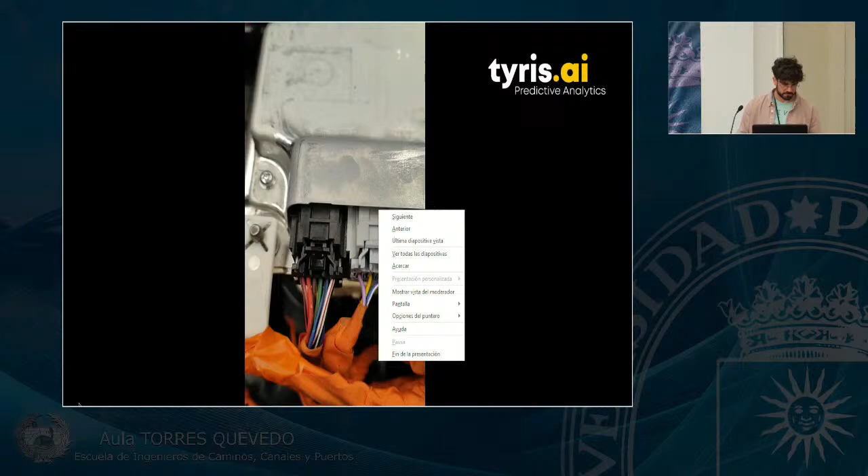At Tyris, we know how important it is to cover the whole data life cycle from the beginning to the end. This is why we are dealing with data sources from the early beginning, from the acquisition phase. We treat data, we squeeze data, we do whatever is necessary, and we extract the most relevant pieces of information so we could feed algorithms, we could feed models that we are making on our own. And finally, we provide end solutions to our industrial customers.

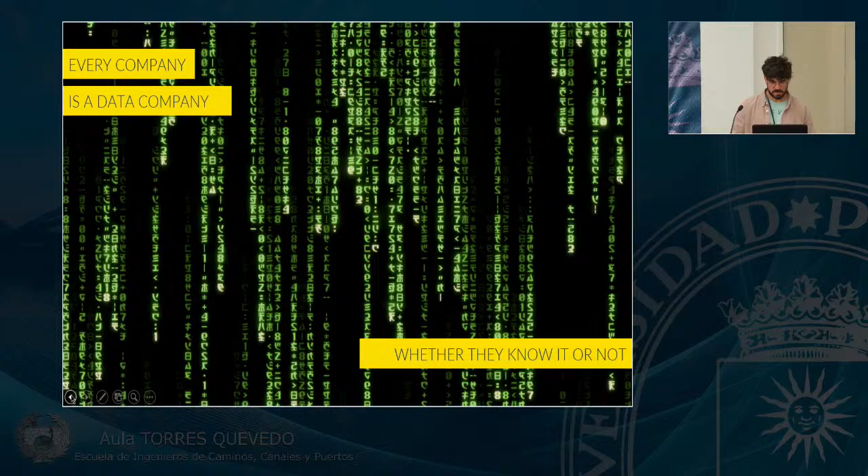And to that end, we are based on 3 pillars. The first one is data integration. What does it mean? It means that we go to the industrial environment and we connect our own sockets to whatever is there, machines, databases, IoT devices, whatever. As an example, we are developing right now a European project in which we are connected to a plastic injection machine.

A plastic injection machine is made of a mold built on two halves, and the plastic is injected inside. This is a European research and development project, and if we achieve this, we will be revolutionizing the way data is acquired and processed.

Why? Here's an example. We are reading pressure and temperature from the injection molding machine through industrial protocols. This is the first step. The second step is data analysis and model training.

This is where the cool things start to happen. These are funnier because we build things that can be seen, like what you see outside — artificial intelligence models that make decisions based on data. In the example I just posed, our model was built by the consortium, a very large consortium made of more than 10 companies from all around Europe.

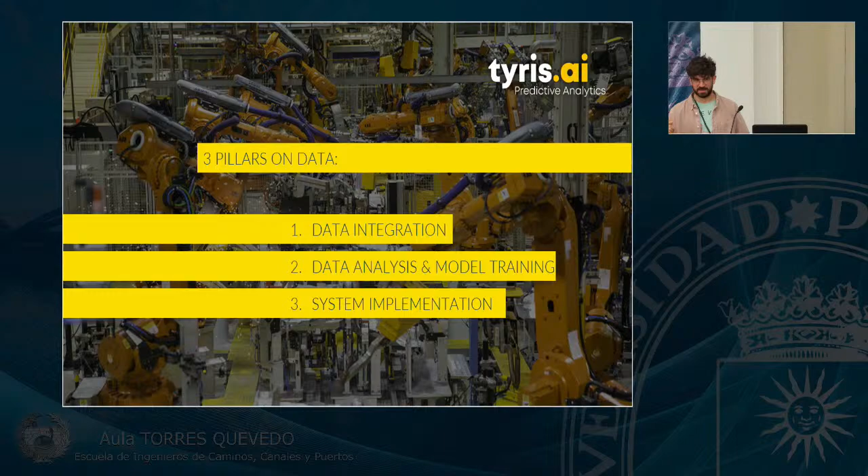But not only that — in the last stage of the project, we need the model to tell us: I don't only know your part isn't going to be okay, but I know the right combination of pressure and temperature so your part is okay at the end of the process. This closes the loop — the model tells us what parameters we need to set in the machine.

This is why I mentioned at the beginning that I was an industrial engineer. I used to spend weeks in the industrial environment trying to find the best combination of pressure and temperature parameters, and that was really difficult — it was trial and error, and that was just 10 years ago.

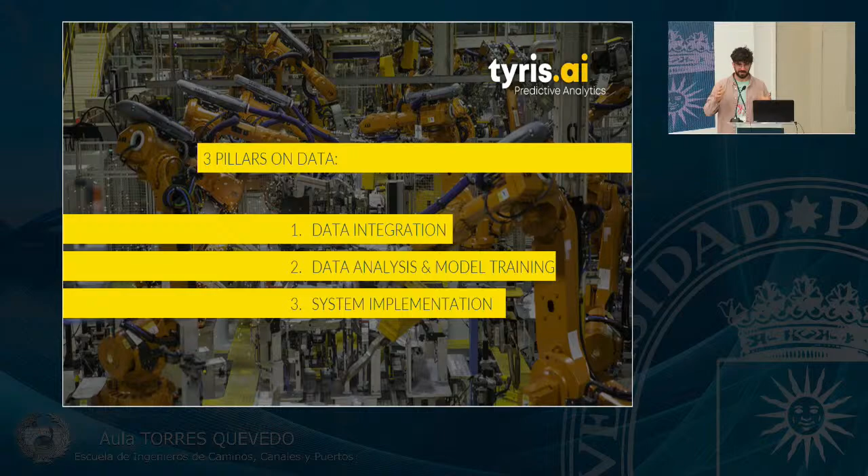Look at where we are now. We're able to say, okay, we have a model doing the work — not with the human outside the loop, but inside the loop.

And finally, we do the system implementation, closing the end-to-end product that we are delivering. We build dashboards and interfaces so we can exchange information with the machine and with the models.

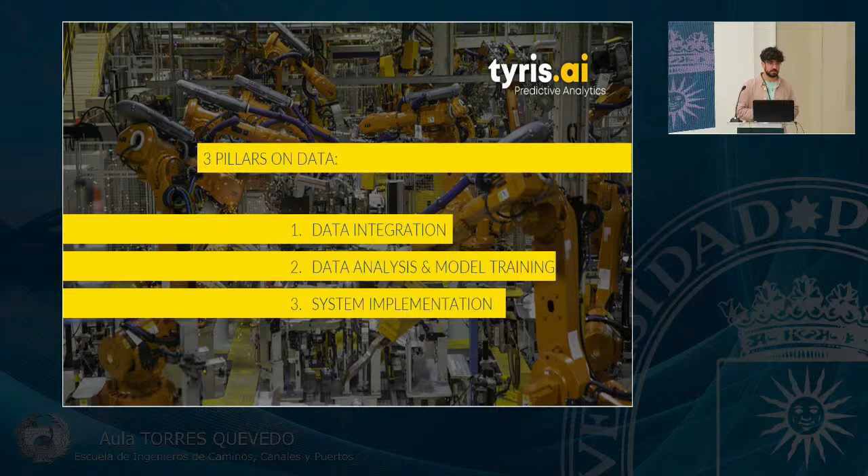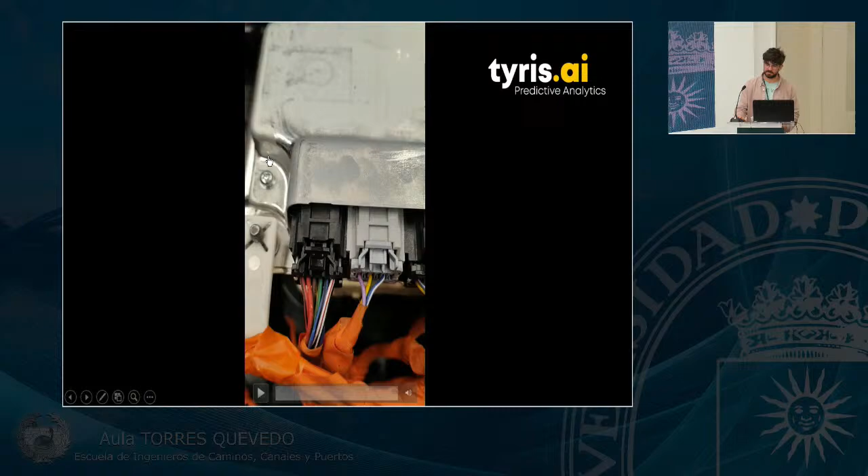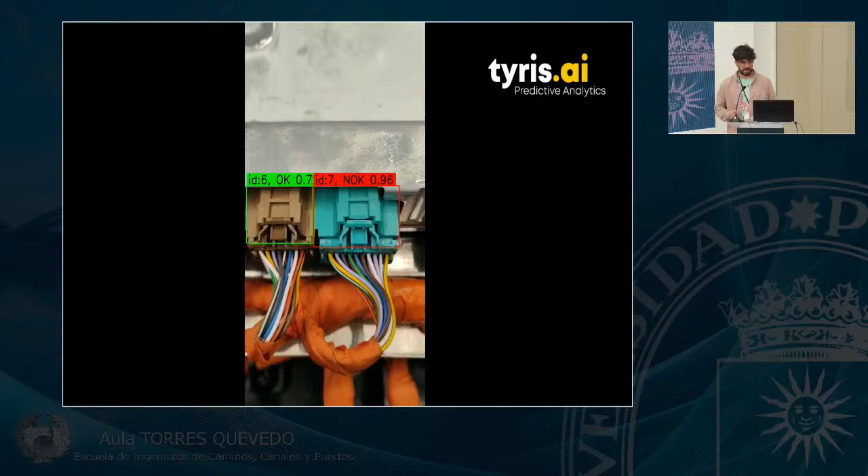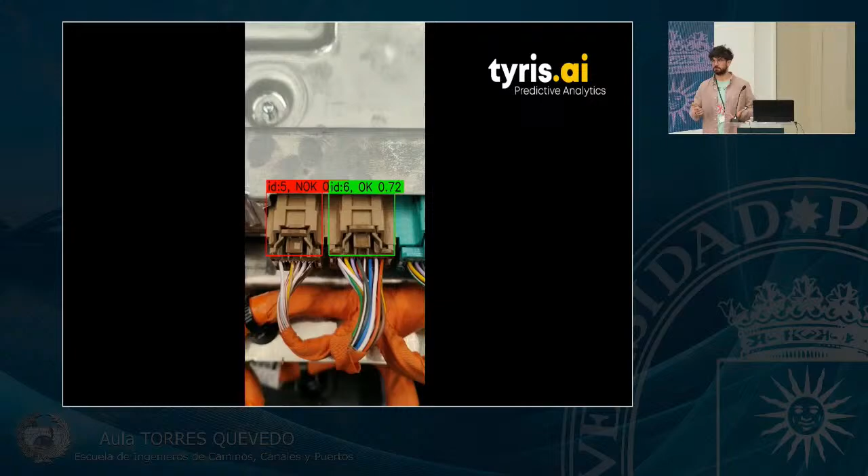I'll be shorter than my colleagues, but here are a few more examples. What you're seeing here is a battery from an electric vehicle, and this is an artificial intelligence model that we built on our own — we don't reuse commercial or existing models from the market, we use our own.

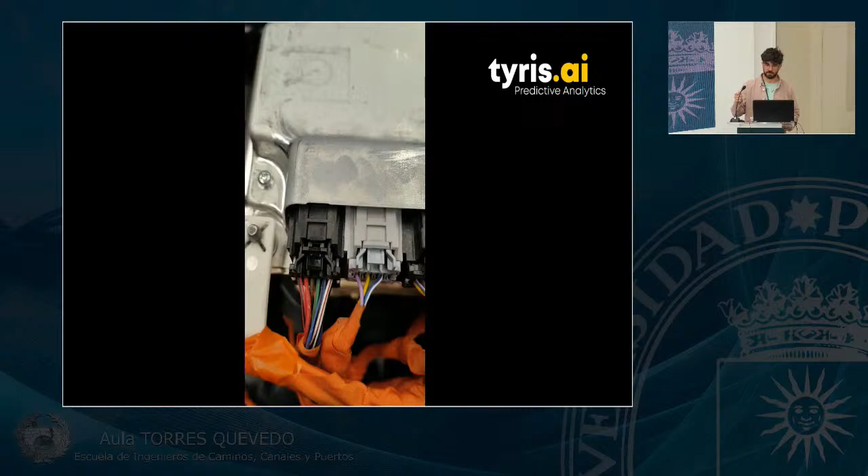This battery is inserted into a vehicle, but sometimes operators are working so fast building the car that they plug the connectors incorrectly. When the car is finished at the end of the production line, if someone in the testing facilities realizes the plugs aren't correctly connected, it becomes a costly problem, because they need to dismantle the rear of the vehicle to find what's wrong.

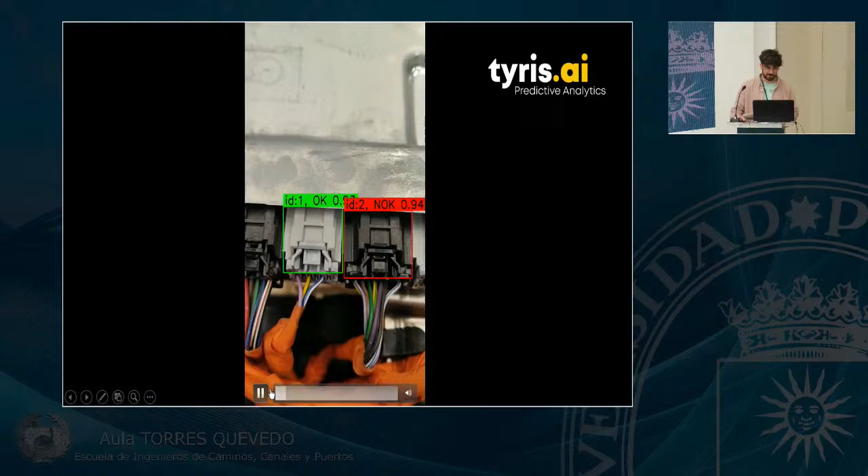I can see what's wrong here, and you could too, because this connector is not correctly plugged. I know it because I'm human, but we trained the machine to make this easy — it correctly identifies which connectors are properly connected to the battery and which are not.

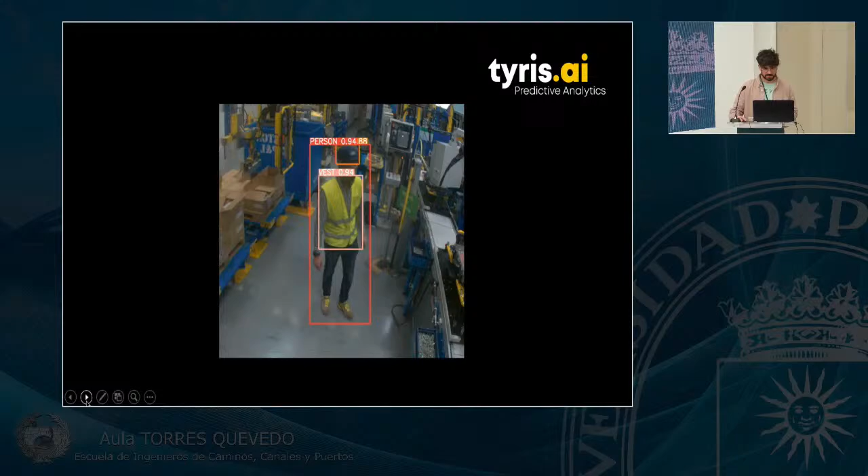Let's go to the next example — this is my colleague Jordi.

We developed another model that first detects persons, then detects vests, and then detects the cap or hat my colleague is wearing. This is a safety application — sometimes in the industrial environment, operators take off their vest, which poses a safety problem.

Whenever the model detects a person not wearing the vest or not wearing the cap, it raises an alarm somewhere in the environment saying this person is not wearing the right PPE, the personal protection equipment.

Also, as our colleague Asunción was mentioning the GDPR, you can understand how difficult this is — you need to identify people, but not in such a way that you can identify everything this person is doing in the environment.

So this is a special case because it is a safety issue.

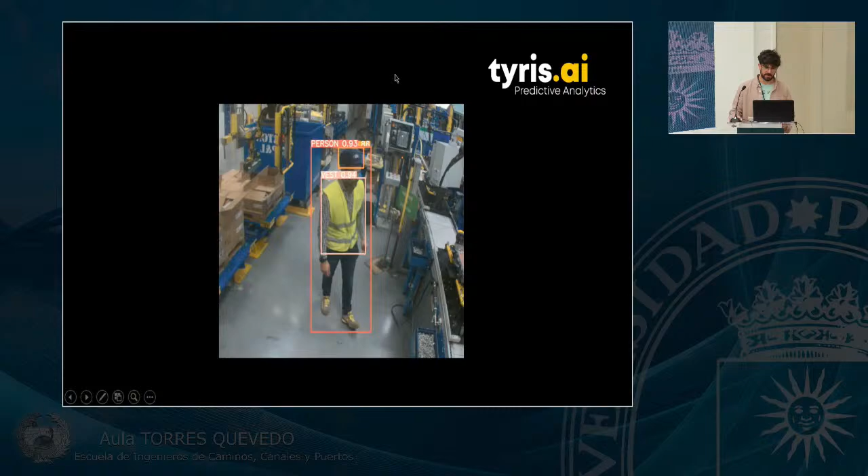But in other cases, for example with the pressure and temperature in injection molding plastic, we cannot do things like creating a data set. We are gathering data every second, pressure, temperature, but we cannot say okay, from 8 to 12 there is one person working on this, and then from 12 to 4 there is another person, because that would pose a GDPR issue. But sometimes we need something similar to that, because sometimes we don't know why the labeling of the data sets are not the same.

So, well, issues and challenges in the industry.

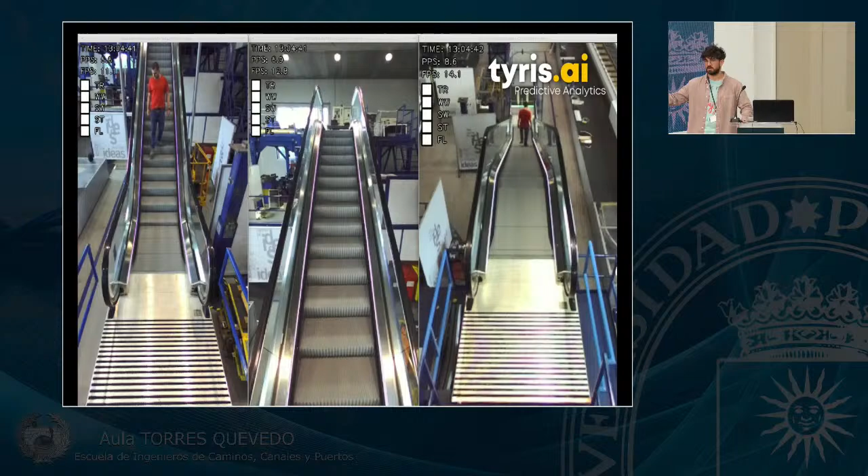I have another example here, which is stairs. This is a static camera in a commercial establishment, and as you can see, this person is doing something wrong. First he was going up the stairs, but then he was going on the other side, and that is detected as something that should not be happening. For example, if that person would be taking his arm outside the stairs, that would be raising an alarm as well. So this is the kind of things that we are doing.

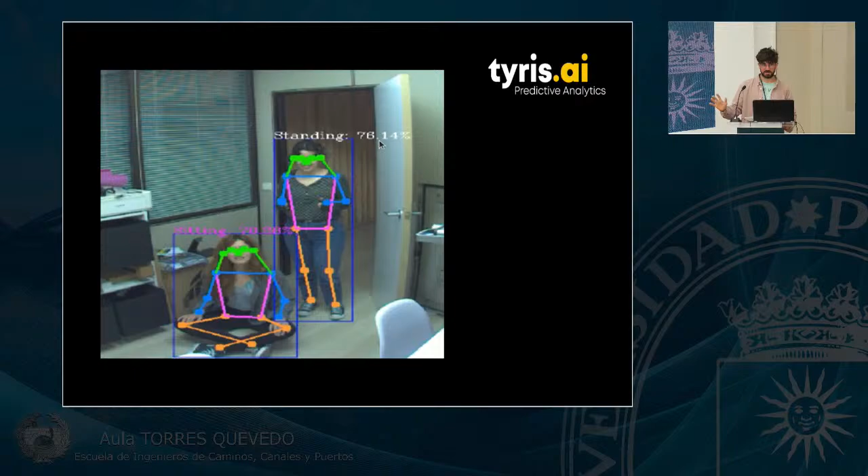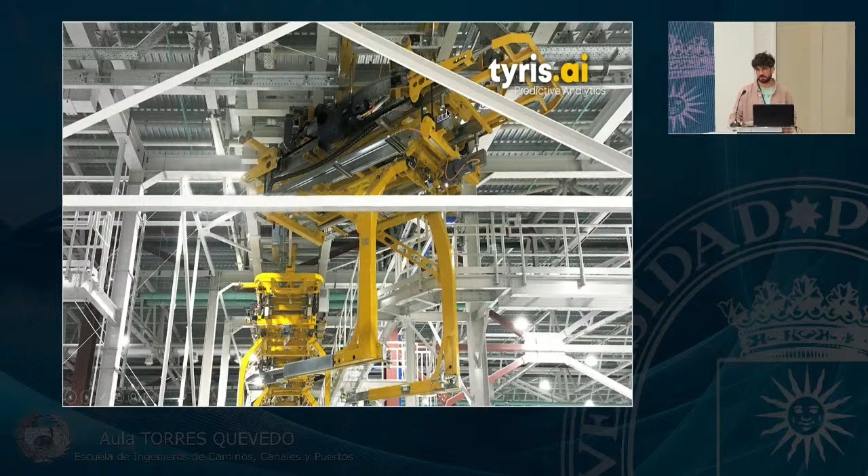But this is data, this is data prediction. We are analyzing, or the industry is analyzing, electrical patterns in the conveyor systems, in these carts. And when the pattern is detected to be anomalous, then that particular cart is separated out of the rails and it is repaired. It is because every minute or every hour the industrial environment is stopped, they are losing millions. Imagine Ford is getting out 2,000 cars per day, so they cannot afford to stop the line for 1 minute. This is very, very critical in terms of cost.

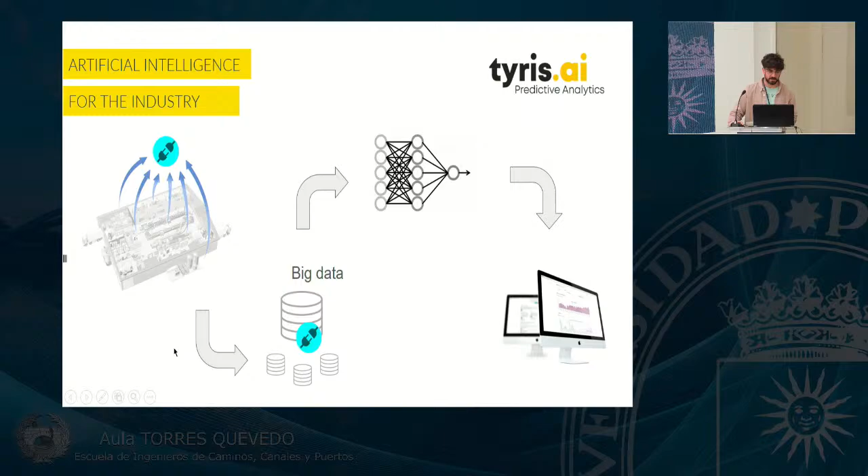It is as easy as that, because we have sensors, we are acquiring data. A manufacturing plant is not static, it is dynamic, but a building, an infrastructure, is also dynamic. A building is alive from a data perspective, and there are always things happening.

Don't think of a building or an infrastructure as a static concept, one used for conceiving the work, and once construction is finished, it's done and not used anymore. Maybe in the past it was like that, but it's starting to change. It's becoming different.

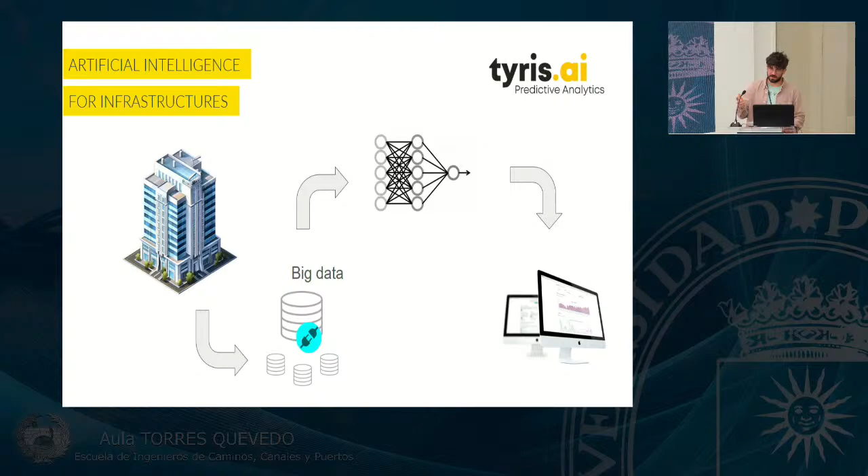Buildings get old, infrastructures get old, so they are always changing, and now with sensors we can track those changes. For example, here is another project we have done. It's a picture, not a video, but I have a video of this too. We did this with one of the most important construction companies in Spain.

What you're seeing is that they wanted two things: drones, and vehicles on the road that could acquire visual data from the road. So these are the results. This picture was taken by a drone, and they can detect potholes, or say something like - and this is even more interesting - warning, there is a high CRT here. Something is going to happen in the future.

So let's talk about the BIM. Traditionally, the BIM was representing the past of an infrastructure. It's like a passport, a virtual representation of what happened in the past, including technical decisions, design decisions, contracts, 3Ds in the best of cases, but not always, and many other things.

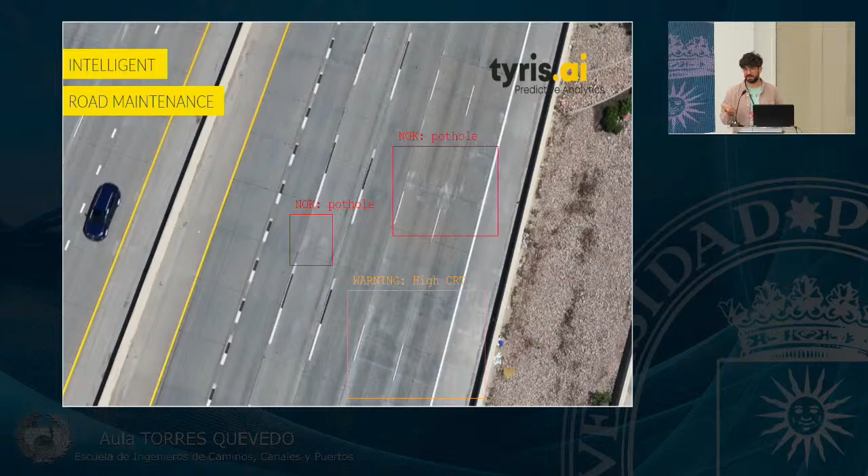Not only that, but the big construction engines are starting to think - and I'm very glad you spoke about that - they are tending to include models in the BIM, but this technology is not yet fully implemented. It is staying in the research, development and innovation domain. We are starting to do that. I want to show you the video of the results.

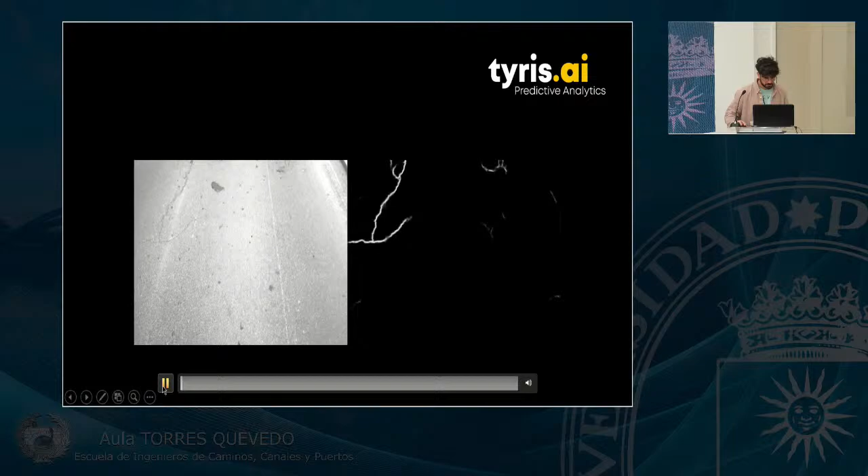This is the model in action. This is what it is detecting. The white areas are the cracks and the not-okay parts - pieces of information that can be gathered in real time.

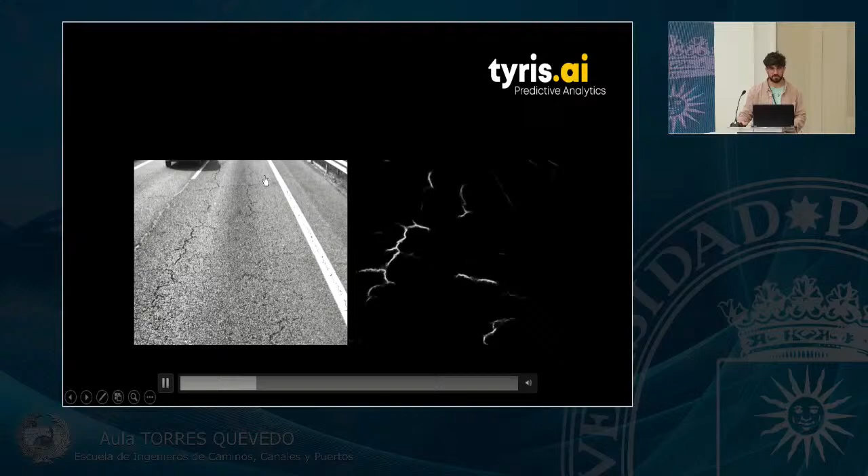This leads me to something that at Tyris we like to call what-if functionalities. A digital twin is a virtual machine, isn't it? It's something representing reality, but not everything - it's like a simple model representing the reality.

As such, we can simulate normal behavior - we can simulate something that is happening to a bridge. But this is very interesting, because with what-if functionalities, you can do things like simulate abnormal situations.

So now that we have a digital twin, the BIM, sensors, and real-time acquisition of data, in 2024 we are trying to include artificial intelligence models inside the BIM, so we could represent what will happen in the future - not in normal conditions, but in abnormal conditions.

This is not easy to do, because a 3D or traditional linear simulation is not enough. We need to implement advanced analytics for that to happen. But we still don't know how to do that. We are spending a lot of money - the European Commission is funding a lot of projects trying to do that, trying to fit artificial models inside the BIM.

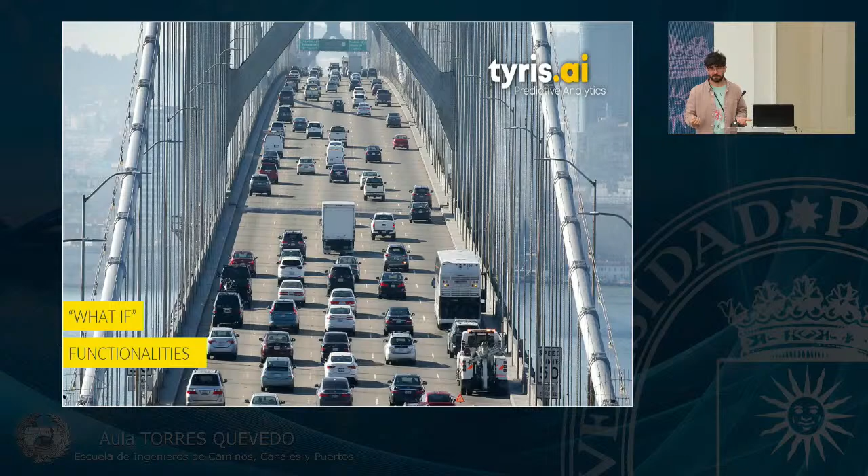One thing we are trying to predict is to link and make a model connecting traffic volume with the predictive maintenance of the bridge. We are not trying to build a model to know if the bridge will withstand charges or resistance - we already know how to do that. But we are trying to link that with cost. If I need to take the traffic to a different road, I could decrease the maintenance of a bridge, and instead of doing a visual inspection every 2 months, if I can do that every year, I am saving money. This is why the industry is going this way.

We're at a very interesting point in time. Very few companies apply the technology in this way. What can we do to push further the state of the art? What can we do to include artificial models, sensors, and digital twins together - these 3 legs of that table?

Well, through research, development and innovation - this is one of the things we are doing at Tyris. There is a program called Horizon Europe. There are many other programs, national and regional ones, but this one is really interesting from our side.

Just to name a few, we have 2 projects ending right now. One is Teaming AI, which is trying to make a digital twin of industry 4.0, including artificial intelligence models. I feel especially attached to this project because I was the development engineer in charge of finding the pressure and temperature combinations in that machine. So now that a machine is doing it, what is my role?

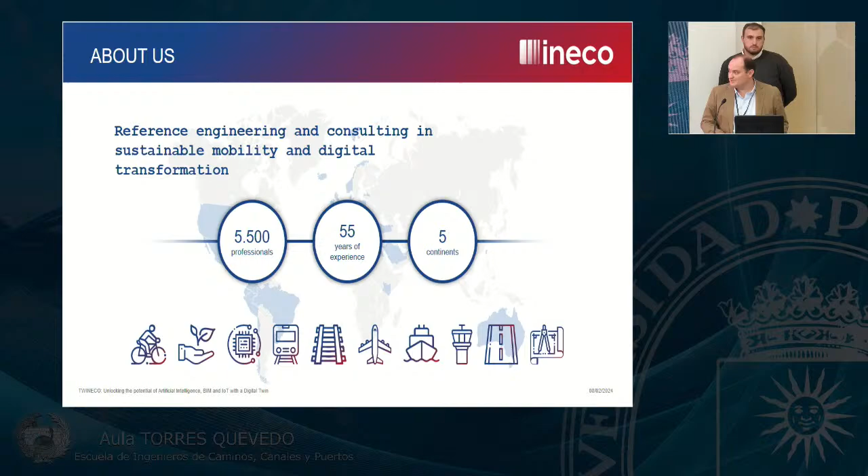And INECO, as a reference in digital transformation, dedicates a significant number of hours to innovation projects, more than 30,000 hours every year. By means of internal calls, every employee can propose their ideas for execution as an innovation project. Some of them are chosen, and finally some arrive to market. This is the case of TWINECO and other projects, other products. This is one of the aspects of our work that we enjoy the most, because innovation is in our DNA.

And why did we decide to implement a digital twin? What problems do we want to solve? To answer this question, we should give you some context first. As I mentioned before, one of the fields where INECO undertakes projects is air navigation.

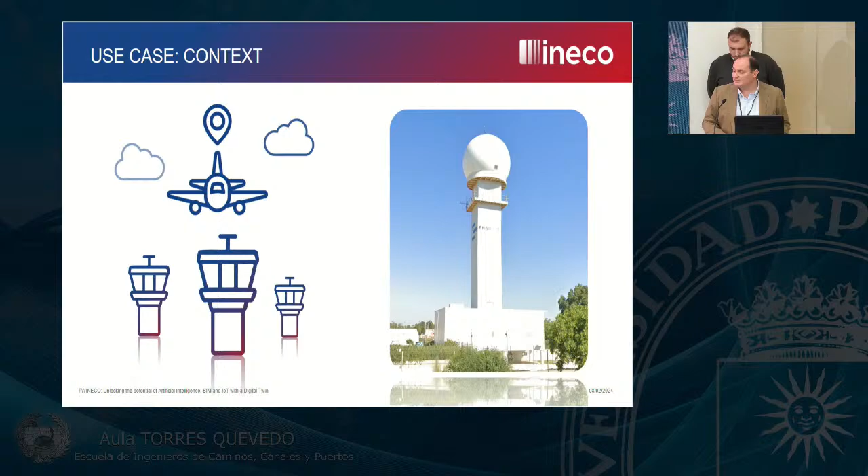One of the infrastructures where the digital twin concept proves to be very beneficial is radar, a surveillance system used in navigation that is used for detecting and tracking aircraft. They are crucial because they provide real-time information to air traffic controllers.

Don't you think that the next year will be exciting for engineering? I don't have any doubt about that, and this is the case in air navigation.

Objectives such as capacity, safety, cost-effectiveness, and sustainability involve demanding challenges that we have to deal with in air navigation. Moreover, there are hundreds of air navigation infrastructures distributed through the territory, some of them in the middle of nowhere, which implies high operating and maintenance costs. For this, it will be essential to rely on tools that help us in decision making in a more and more complex and volatile context, with an increasing number of systems and information sources. Moreover, these tools should let infrastructure operators optimize their operation, keeping in mind sustainability.

So current trends of centralized information, interconnection of systems, or new technologies such as IoT, artificial intelligence, or BIM can be the best enablers for infrastructure operators.

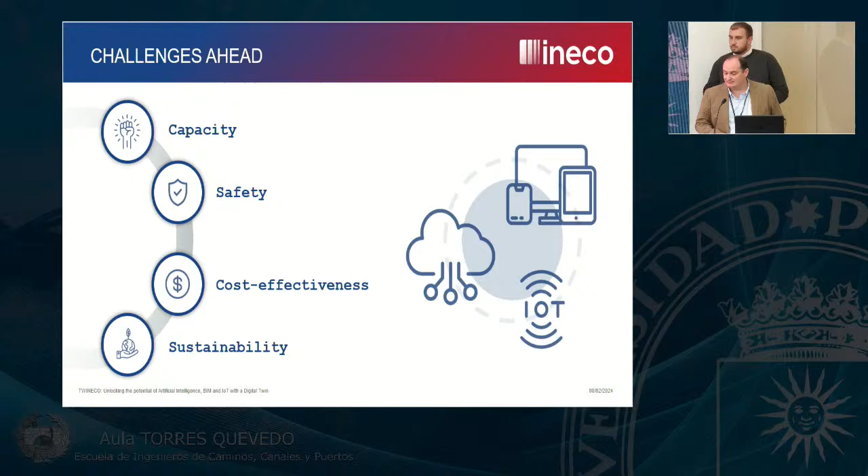Infrastructure operators can take advantage of this concept, and we will show through an example the success case of TWINECO. As a result, TWINECO works as an integrator of information and tools based on new technologies that enable quick decision making, optimize operation, and reduce environmental impact.

This system lets us perform immersive browsing through the three-dimensional model, besides the information that comes from the BIM model. In addition, and I think it's one of the most important parts, it gives access to real-time data related to the operation of the shelter and equipment of the radar. This information is provided by sensors and a deployed IoT system, besides other information sources such as meteorological information.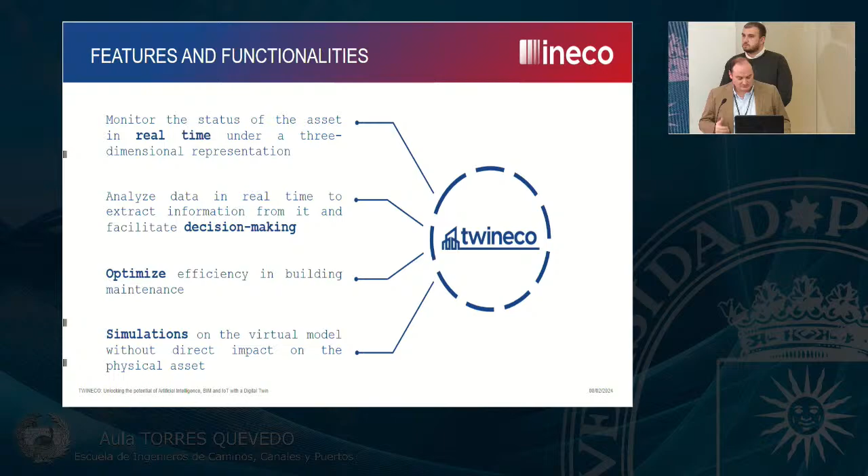TWINECO also has better performance than traditional monitoring and management systems because it enables simulation and predictions, optimizing infrastructure operations, and as a consequence enhances maintenance efficiency, sustainability, and resilience using artificial intelligence and machine learning models for predictive maintenance, energy optimization, or the ability to simulate different contingency scenarios.

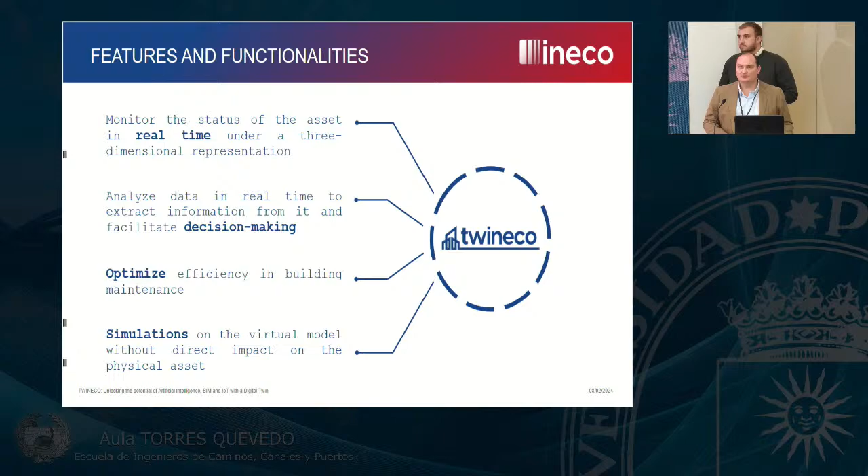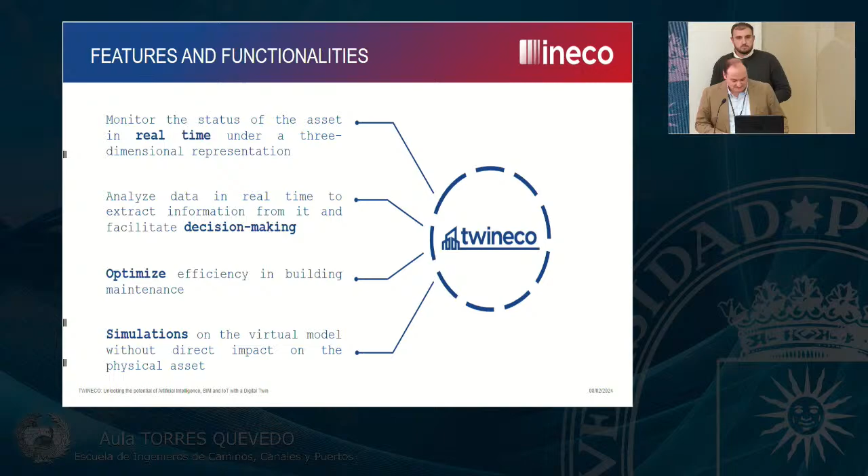For example, engineers can ask questions like, what if we increase the shelter temperature by 2 degrees? How would it impact energy consumption or equipment performance? Or what if the air conditioning fails? One of TWINECO's strengths lies in its flexibility and scalability, allowing the integration of additional information sources and simulation models, and adapting to evolving needs.

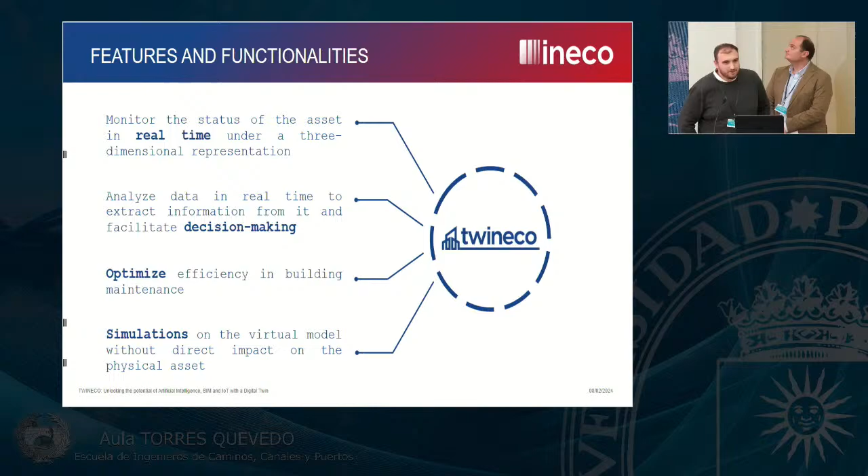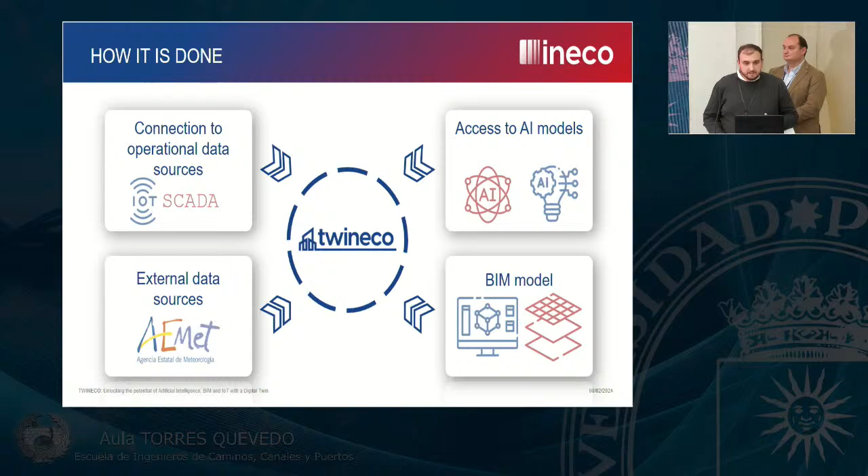First of all, we can differentiate 3 main parts of the application. One is dedicated to generating the user interface, commonly called the front end. Another is to manage the information through the application, that's the backend. And around it, the rest of the information access services. This information comes, for example, from the IoT systems, the SCADA systems, or the sensors deployed in the building.

Or, for example, other external sources of information like AEMET to obtain the meteorological information of the place. Also important is access to the artificial intelligence models developed, and the acquisition of the 3-dimensional model coming from a BIM project, and the necessary tools to interact with them. This architecture improves the performance of the application and allows great scalability when trying to connect new sources or new buildings.

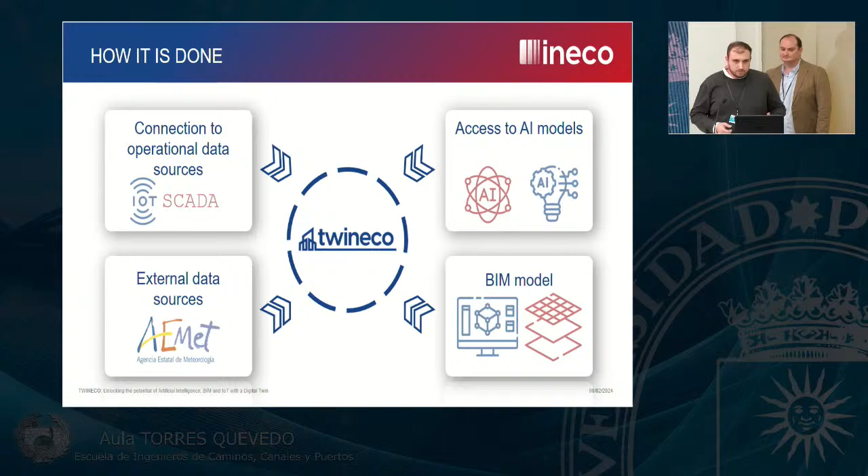Now we'll try to introduce the application by exploring its key functionalities, giving a guided tour of its navigation interface through the building and the visualization of the data. In addition, we will show you the access point of the simulation tools, as well as the representations of the results generated from the artificial intelligence models. To do this, we will show you some videos using the application where you can see each of the 3 main functionalities, which are the navigation from the 3-dimensional model of the building.

The real-time information windows, and the simulation tools available. In addition, we will try to describe the main characteristics of each one. And therefore, let's watch the first video.

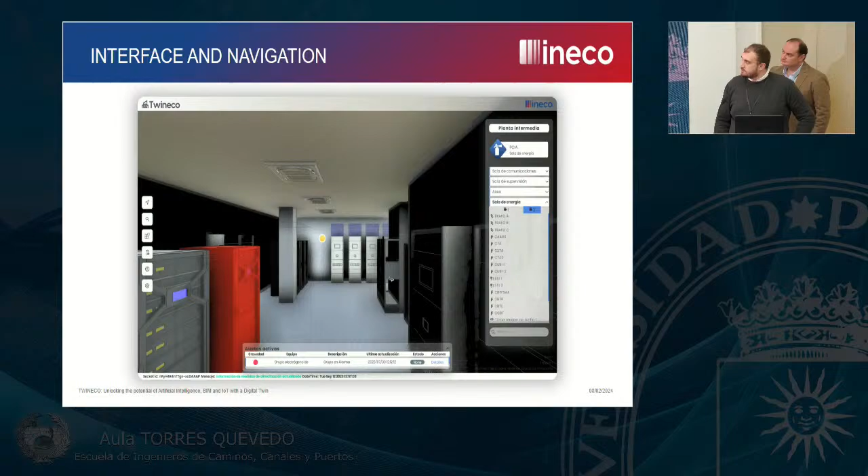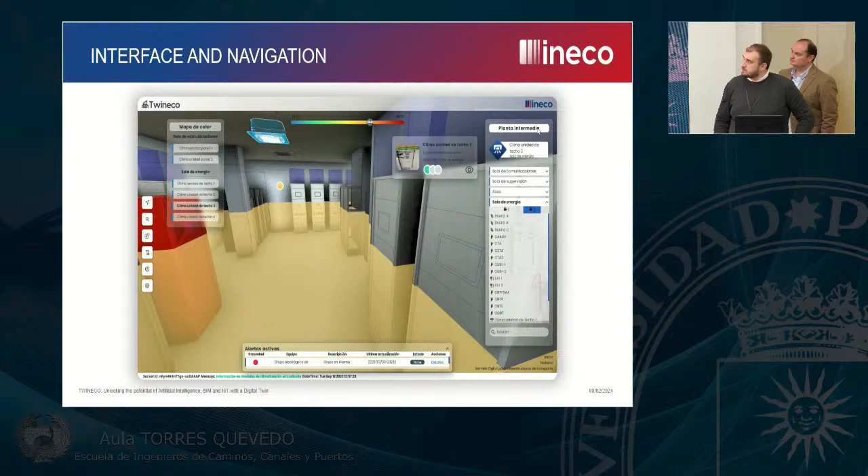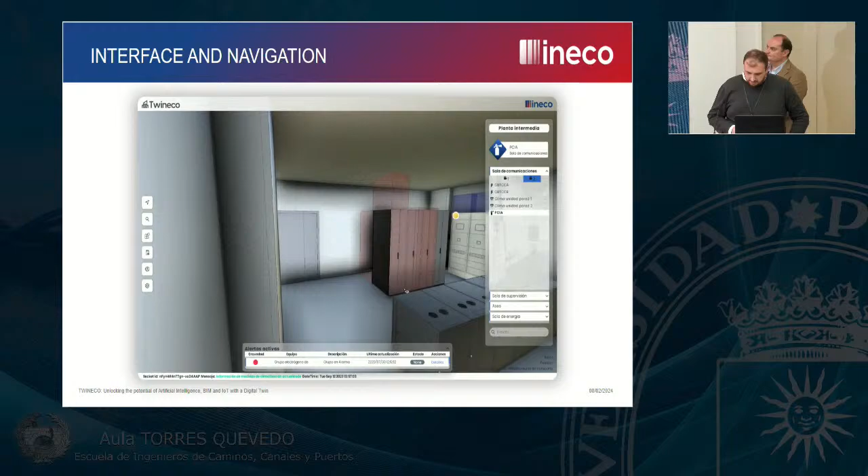As we can observe, TWINECO shows a clean and intuitive interface that highlights the three-dimensional model of the building, and all the navigation options of the application, using, for example, drop-down menus and other pop-ups for the different options and elements of the application. In this way, users can easily navigate through the floors and all the rooms where we can find all the devices and their respective properties.

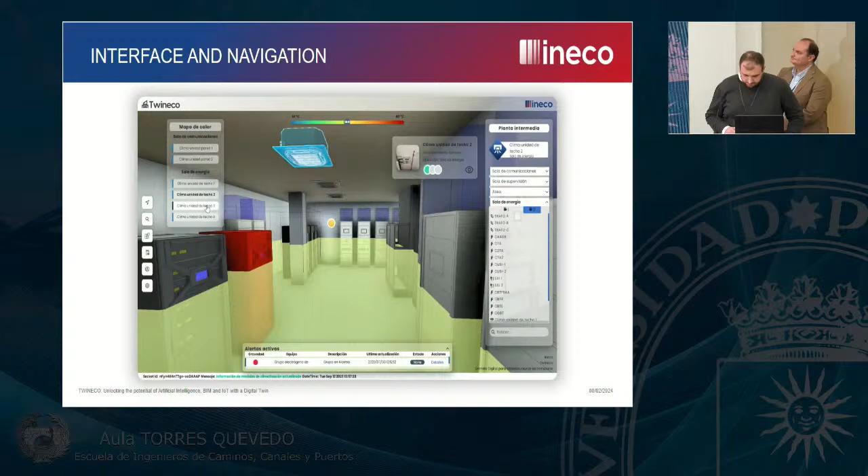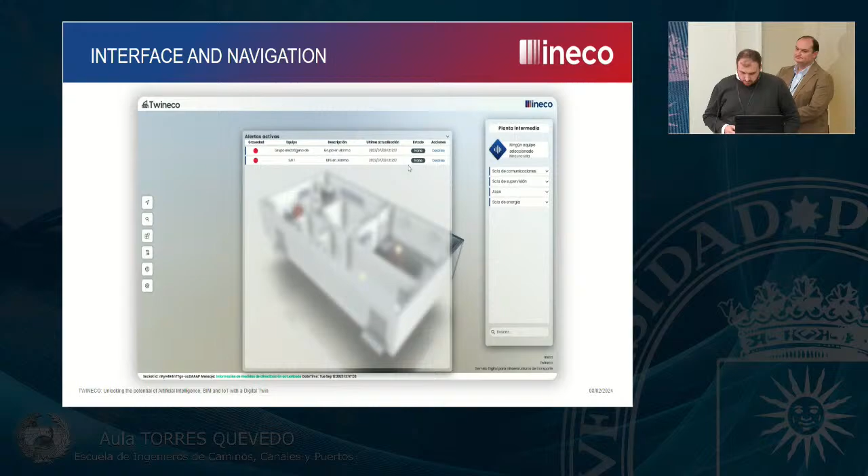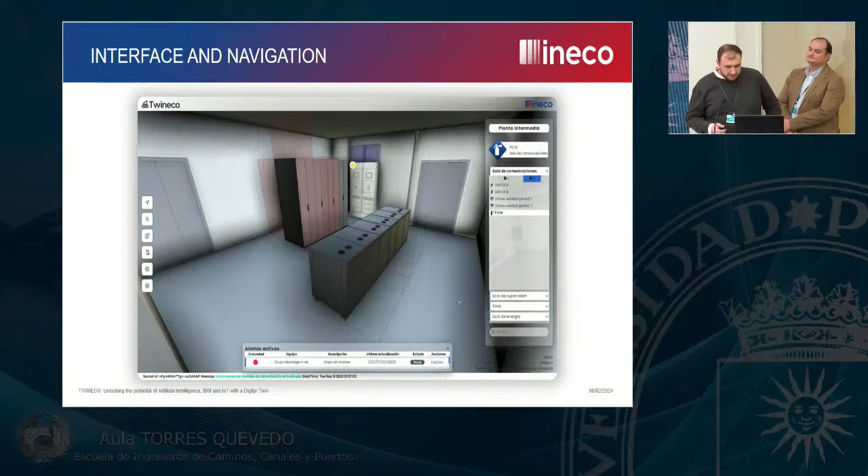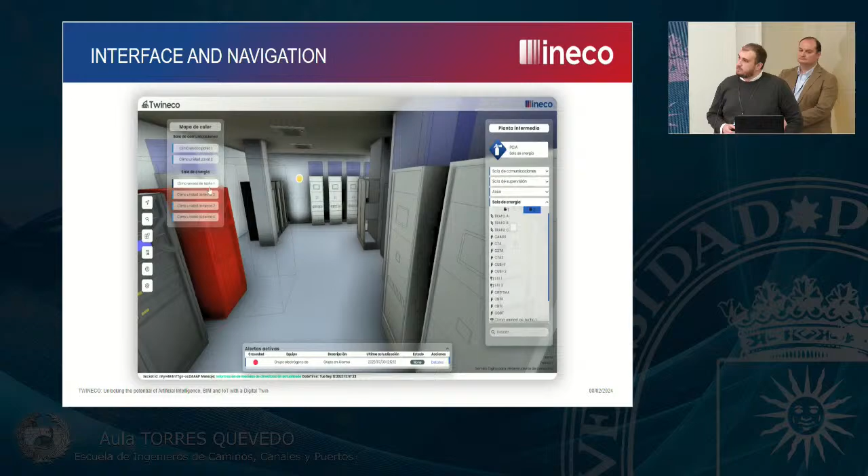In addition, the interface provides an instant display of the essential information for the maintenance of the operation of the building. For example, users can easily check the alarm status of the equipment, painted in red in case of alarm, as well as the climate details of each room, all clearly displayed on the 3D models, using, for example, a heat map over the room. The application provides a comprehensive view of the site's attributes from a single point, giving information about the environment and the current status of all the equipment.

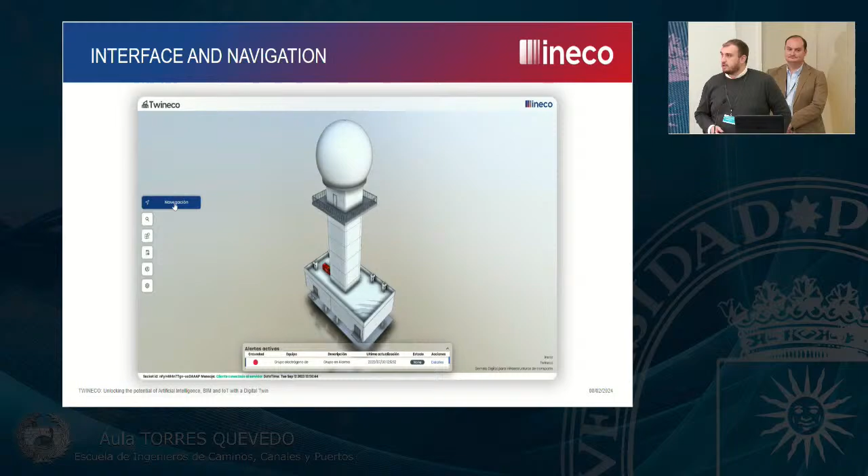And next, in the following video, we can see how the data of each device is displayed. Let's go.

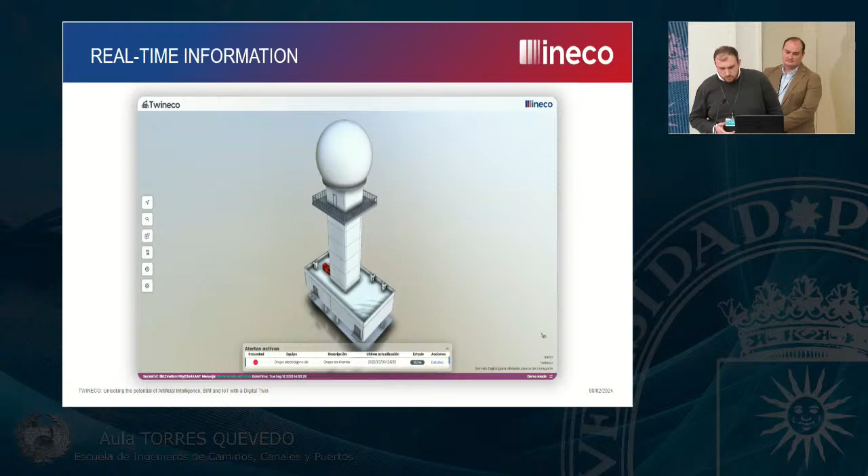TWINECO has the capacity to not only show limited data, it can also handle large volumes of real-time information for all equipment. The application provides operational information windows which can display all the discrete or analog data collected by the sensors or IoT system deployed in the building. This capability allows us to monitor the operation of all equipment. In the event of an error or alarm, it's easy to locate the reason for the incident. In addition, we can cross-check all the regular operation data with maintenance actions. In essence, TWINECO can host all the pertinent information about the physical asset, making it accessible from anywhere through a unified platform.

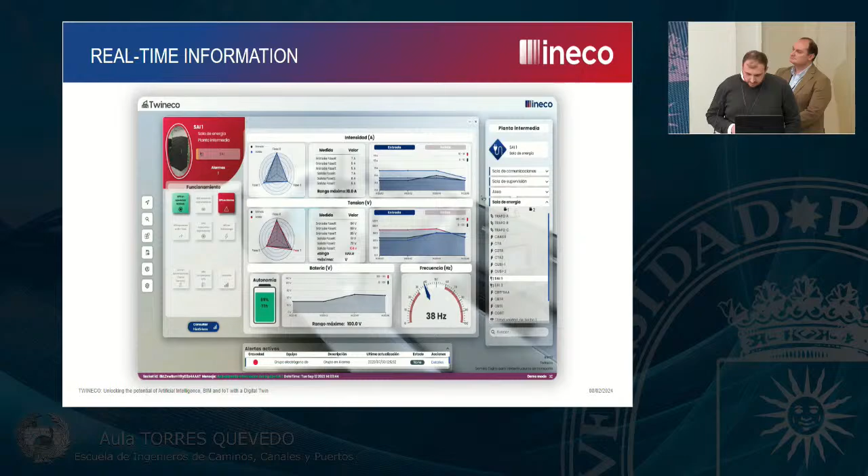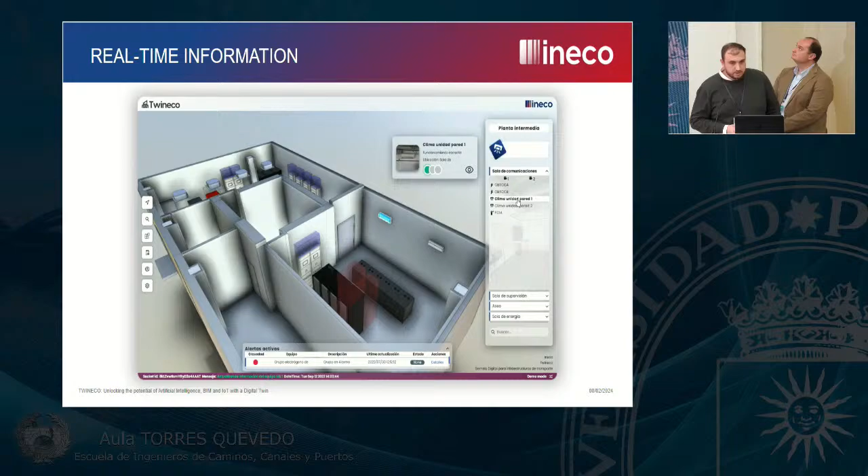And now, to finish, we will see the following video, in which we will see some of the simulation tools that have been developed using artificial intelligence models. Most of them are related to achieving sustainability objectives and the optimization of building energy consumption.

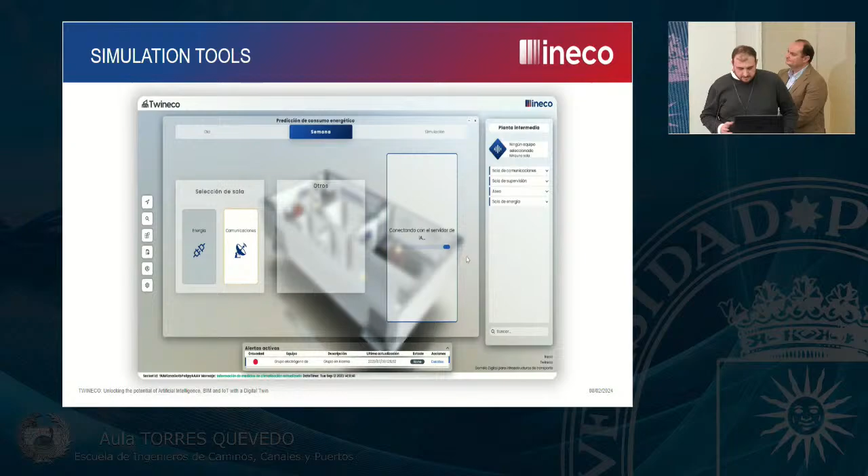Some of these tools are designed to achieve sustainability goals, for example by optimizing the energy needs of the air conditioning equipment, basically analyzing the historical consumption data and the climatic conditions of the place, and modifying some of the air conditioning parameters, such as the temperature of the climate machines.

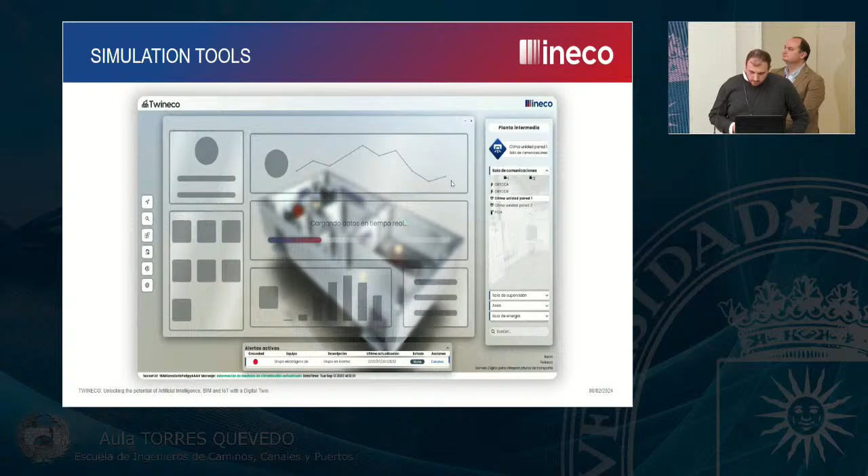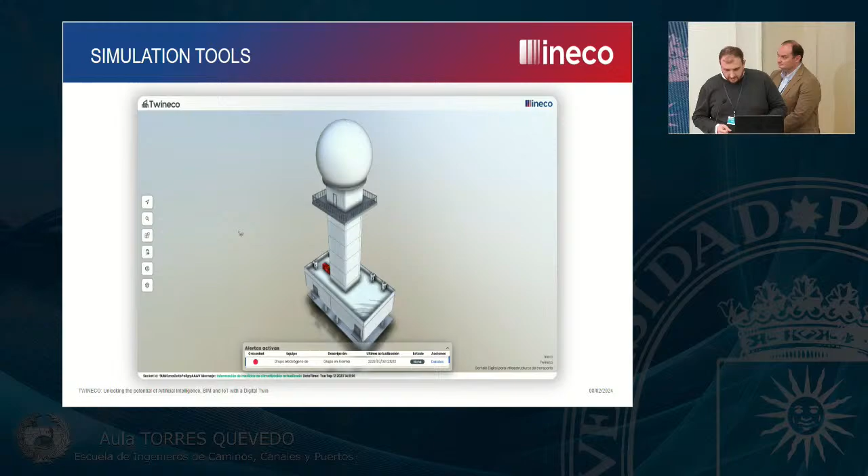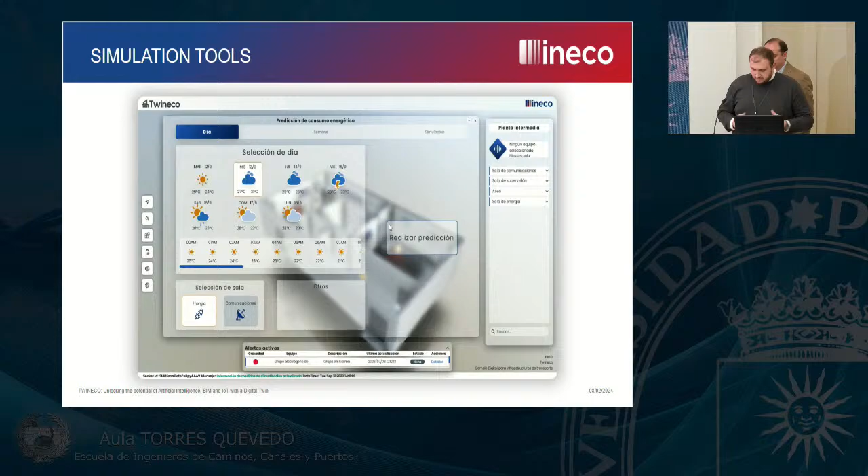On the other hand, others have been designed to detect the impact of possible equipment failures, for example simulating a scenario in which air conditioning equipment fails. These tools allow us to know the time it will take from the failure of the air conditioning equipment until the room reaches a temperature that we can consider dangerous for the correct performance of the radar equipment. In addition, it shows the evolution of the room temperature over time, represented on the three-dimensional model.

In essence, these tools elevate the level of control and monitoring of infrastructures. They use real-time and historical data from the installation to make predictions and simulate scenarios that optimize its operation.

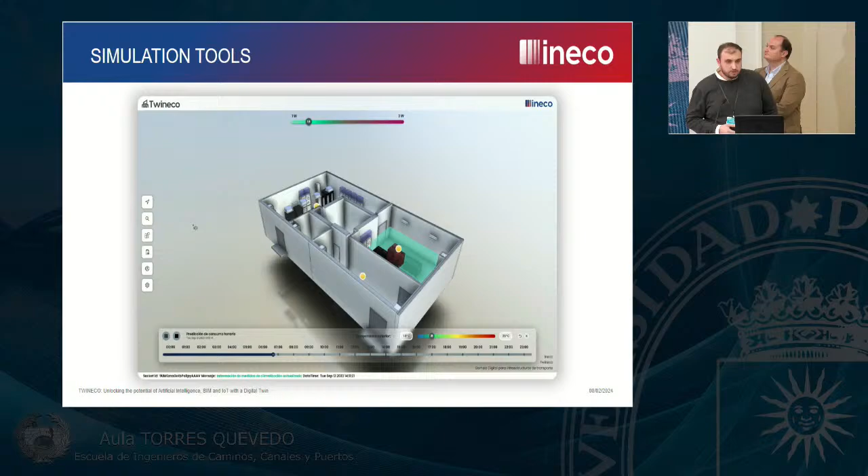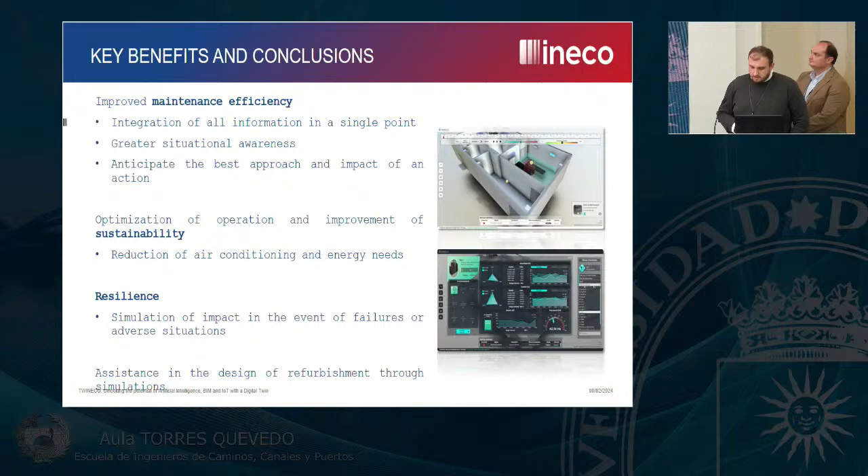And to finish, in conclusion, TWINECO is a game changer. It improves maintenance operations by centralizing information from different sources, improving situational awareness, and making data-driven decisions easier. Moreover, TWINECO incorporates simulation, prediction, and optimization tools that enhance efficiency and sustainability, for example by optimizing air conditioning needs. Apart from that, TWINECO has the ability to perform contingency impact simulations that significantly improve infrastructure resilience.